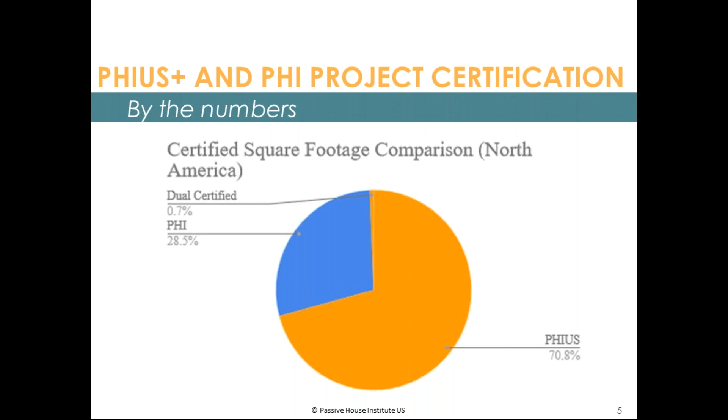You can see that PHI currently has a share of like 28.5%, and PHIUS+ has 70.8% with the climate-specific passive building standard, unlike the PHI standard, which uses one certification criterion in all climates everywhere. So now this is all just PHIUS+ data, only PHIUS+ projects. As I mentioned, we keep a very close look on the data that comes in from certified projects.

Here on the left-hand side, you can see that we're, of course, logging all the square footage that is in the pipeline. And in that graph, we can see now that we're very clearly on an exponential growth curve. We're doubling compared to last year, and we're well on our way regarding the projections here. And the projections for 2019 are indeed to reach 10 million submitted square feet by the end of the year.

On the other hand, PHIUS+ certified and pre-certified square footage, that essentially are the projects that are fully done, and those that have gone through the pre-certification design review and have been approved for going into the construction phase. Often those pre-certified projects then stay in that construction phase for quite a while until they get finally certified. So this is a good view of the projects that are either completed or in the process of being constructed. And you can see right here that those now total roughly 5 million square feet as well. So this 1-to-2 ratio that I mentioned earlier.

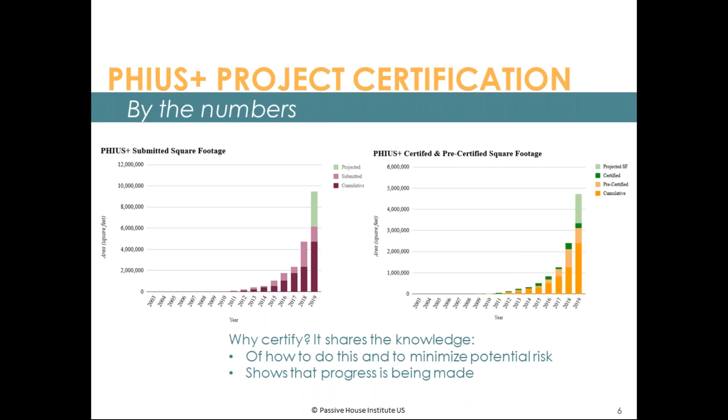And we are very happy with that result. Of course, this is not good enough yet. We're trying to get within 5%. And we keep continually improving our modeling tool, in this particular case here, the WUFI Passive modeling software.

I'm not sure why I am having trouble advancing.

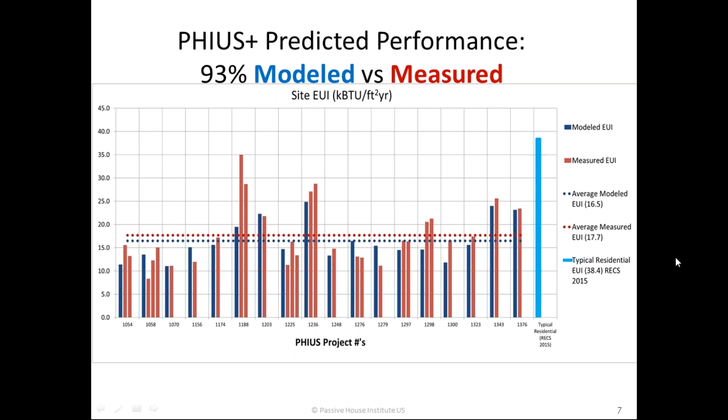Okay, here we go. PHIUS+ certification. So at this point, where our source energy targets are set, and I'm going to show you here in a second the architecture of how the standard works again quickly as an overview. But just to put us in context in relationship to other organizations that are pushing for similar goals. Here, the Architecture 2030 Challenge that you might all be familiar with. We are currently on target to meeting their 70% carbon reduction goals here within their system.

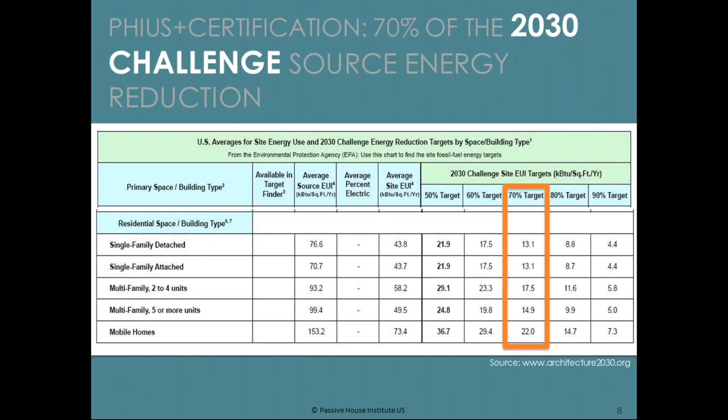But really where the secret sauce of passive building and the PHIUS+ 2018 design methodology comes in, that is a different focus than just looking at source energy reduction and carbon energy reduction. We are also first and foremost looking at optimizing the envelope for the best possible result in terms of conservation before we hop off to getting into other renewable solutions and active generation.

And this kind of architecture that we're talking about here, pass-fail standard, is still the same kind of architecture under PHIUS+ 2018, but really the secret sauce is here that we're setting cost optimized, climate optimized, and that means optimized for comfort and resiliency, space conditioning targets that first help the designer to dial in the envelope for the building and the loads and the systems. And only once those space conditioning targets have been met, then a total source energy criterion is applied, and that has to be designed too.

So under programs that are just requiring source energy reductions, EUI reductions in order to reduce greenhouse gas emissions, those programs are missing, in our opinion, this critical step of optimization to take advantage of conservation in the built environment.

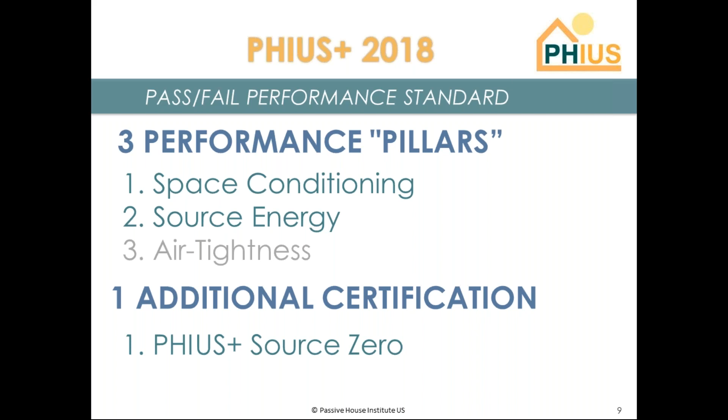So the methodology here that we're using to dial in the climate-specific space conditioning targets and to also cost optimize them is that for 2015, we developed a methodology to use the BEopt tool from NREL, from the National Renewable Energy Laboratory, to help us optimize for the sweet spot between conservation and generation.

You can see this curve right here on the left-hand side where you see the number 1. That is basically the code baseline. The green line represents energy use reductions. And then the more you invest in the envelope, and then once you get past the point of diminishing returns, you push back up into the diminishing curve for the upgrades, and they do not pay back.

So we used that tool to identify this sweet spot on the path to zero before it becomes more cost effective to switch over to renewable energy, let it be off-site renewable energy or on-site renewable energy, to generate that particular sweet spot for all different climate zones, locales, and considering the North American cost structure.

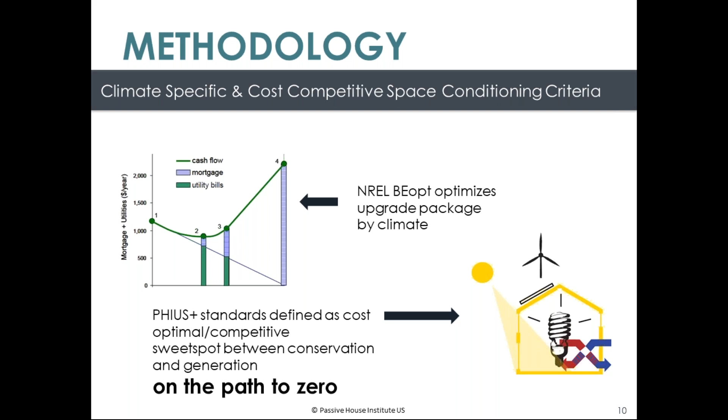And we have computing technology now, like the BEopt optimizer that NREL has developed, that can actually calculate these optimal design points. So space conditioning, why is this the critical secret sauce here for PHIUS+ 2018 before we aim to get to zero?

Again, for PHIUS+, we have 4 different criteria that have to be met under the space conditioning pass-fail segment. We have the heating demand, the cooling demand, and they all differ by climate. We have the peak heating load and peak cooling load. All those 4 criteria have to be met.

And the reason why they have to be met is, for one, the annual demands for heating and cooling actually translate into the kilowatt hours saved on an annual basis, so they pay back the initial investment. And the low peak loads, they ensure comfort. They also ensure resiliency, passive survivability, and they also reduce the mechanical system sizes, follow-up maintenance, and so forth.

So in 2015, the reduction versus code, in the study that we published with NREL, the climate-specific passive building standards, we showed that the targets could easily be reduced for heating demand and cooling demand compared to the code baseline. For heating by almost 90%, for cooling almost 50%. And cooling is much harder to do with passive measures.

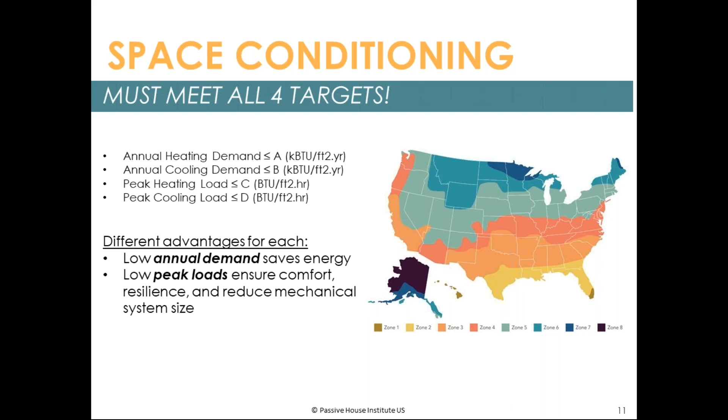But the good news was here that the peak load capacity was much closer to each other, like 77 peak for heating and 69 for cooling. So that results in an overall total energy reduction of 80%, and with that, the related carbon emissions. And we were absolutely on track with what we were doing here.

You can see right here the Building America Research Agenda for the time period of 2020 to 2030. They are very much looking at what we have already established in PHIUS+ 2018, crushing the thermal load even further compared to their work from 2010 to 2020. And that qualified us to then enter into a partnership with the Zero Energy Ready Home program.

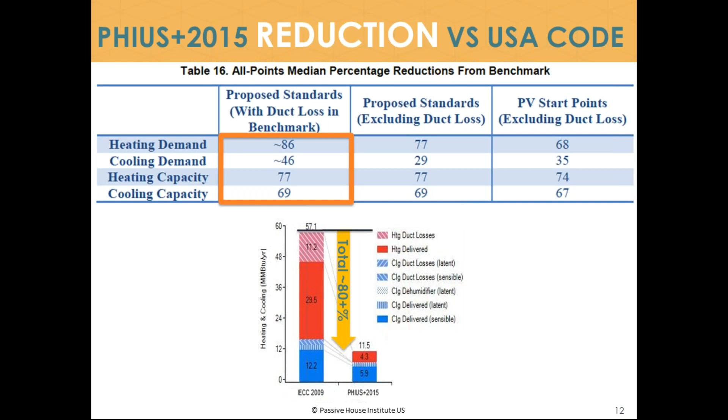We are the only climate-specific passive building standard that exists, and they honor that by making us a partner of the Zero Energy Ready Home program. We also require Zero Energy Ready Home requirements as a prerequisite to our certification, which is a really solid building science foundation, a bit more on the prescriptive side of things, but again, more requirements to ensure that risk is mitigated and that the quality and the durability of the building is assured through the certification process.

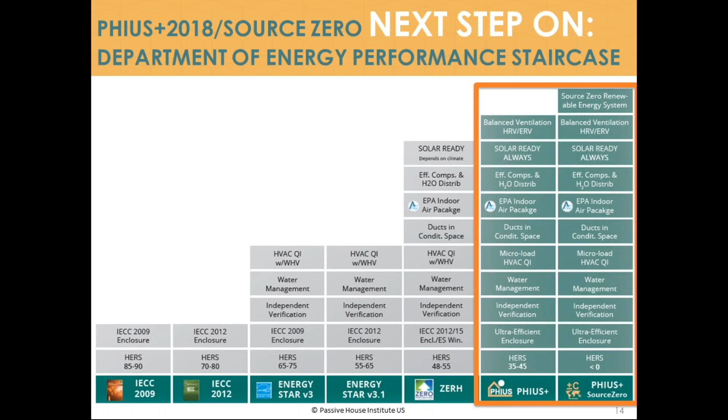And again, here, Sam Rashkin from the Department of Energy Zero Energy Ready Home program created this kind of staircase that follows along the Department of Energy research agenda. So that takes me to the process and the actual PHIUS+ 2018 updates.

The passive design principles, nothing new. Most of you are familiar with those. I think we all have gotten really good at employing them and understand them very well. Just quickly going through here again: continuously insulated envelope, no thermal bridges, airtightness in buildings is an excellent measure to bring the energy consumption down.

To increase energy efficiency, we have heat recovery ventilation, controlling shading, dialing it in by climate, shading and heat gain as well. And then we also have the hygrothermal side of things on the bottom half of this circle that we need to concern ourselves with.

The humidity, how the humidity affects the energy balance, how the humidity affects the envelope. Do we have condensation risk in the envelope? How does the HVAC system interact with the envelope? And then also we have the hygrothermal storage. That lower half of the circle, those are all elements that really need to be calculated in a dynamic tool to accurately represent the effects of moisture and thermal storage and interaction with the HVAC system on the building.

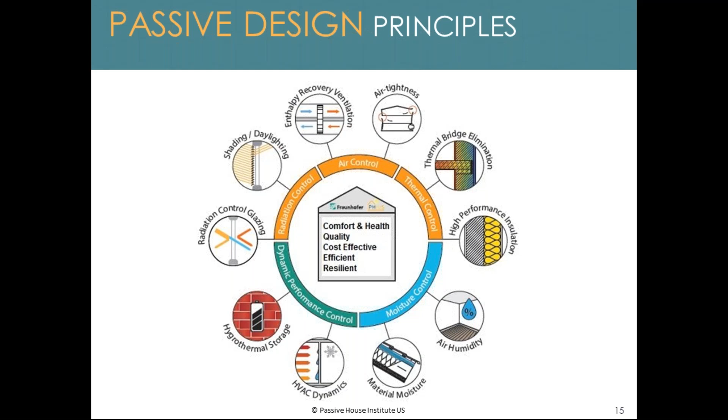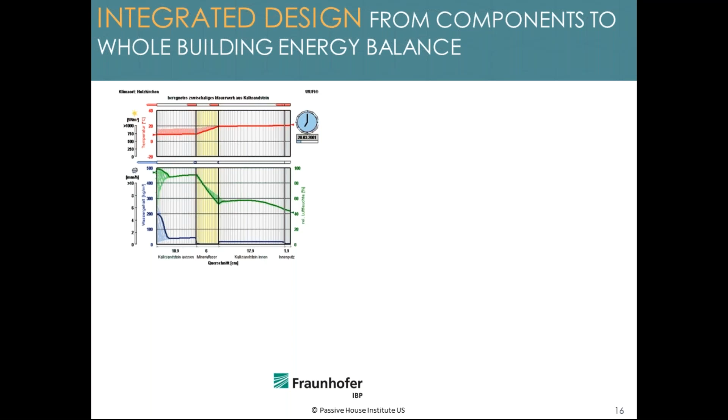So once we dial all that in, then we get a building that is very comfortable and healthy. Quality is high, the durability is high, very energy efficient and resilient. So to do that, we now have quite powerful dynamic tools that can perform this analysis for us and help us in the whole building energy simulation, taking all these factors into account: climate data, air exchange, inner load, set points, all the specifications for the envelope.

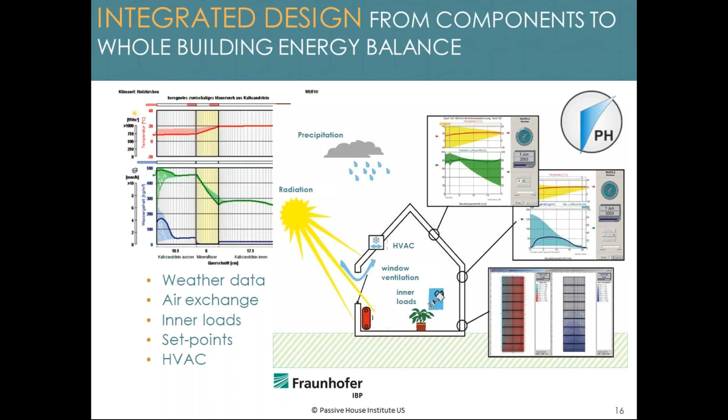The WUFI Passive tool can now analyze and help you to dial in the components for the building envelope exactly for your specific climate location, and you are being guided by the specific energy targets. Again, the energy targets are really crucial to get a well-optimized building for that particular location, and also built into the actual targets is the cost optimization for that location. So you get the best optimal result at the best cost for your building.

Now, when we decided to recalculate those targets that we had established in 2015, we were able to use a few learnings from the years up to 2015, up to the rework of the 2018 standards. For one, as I mentioned earlier, initially we had seen only single-family projects, but we soon saw a lot of very large multifamily projects come into the office for certification. And very quickly, it was clear that large buildings have a much easier time meeting the targets that we had set.

So the initial 2015 targets were set based on a standard single-family home, 2,500 square feet, and the theory there was that that is really the worst-case scenario, and anything bigger will have no trouble meeting these standards. But because we have this computing power at our fingertips now, the Building Energy Optimizer and WUFI Passive, we were able under 2018 to set our goal a little bit higher and say, look, we don't have to be that non-granular, just establishing for the worst-case scenario and saying everybody else is going to have an easy time to meet it.

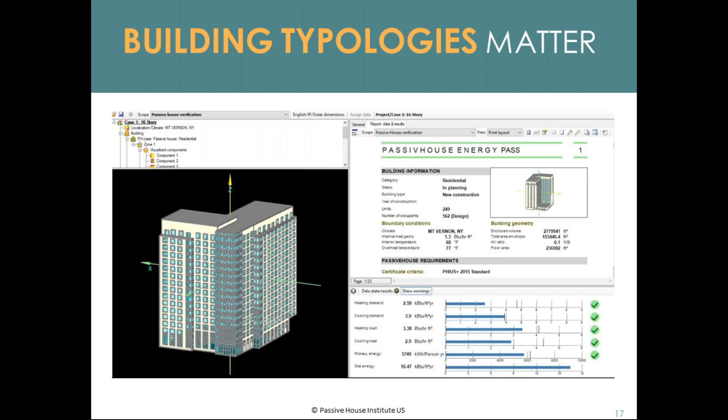We can actually optimize not only by climate for the North American cost structure, but we can also optimize for building typology. And it's not only that we can, we should. So that's essentially what PHIUS+ 2018 is about, as well as a shift in thinking about the source energy targets. So just quickly here, a summary of this idea: big buildings, you can see this on the right-hand side, much less R-value required in the walls to meet the targets under 2015.

And then the little building, single story, lifted off the ground here. This is a Staten Island project. It had a really hard time, to a point where the builder is not going to do it again because it was cost prohibitive. This was a grant-funded project by NYSERDA actually. The builder had initially committed to 5 projects, but I think only 3 were built, and it was clear that the R-values were not cost effective, so it was abandoned. So there was a clear need to create targets that are more specific to the individual building typology.

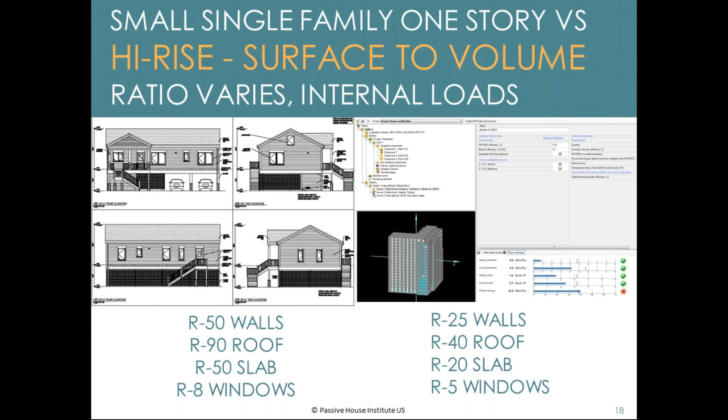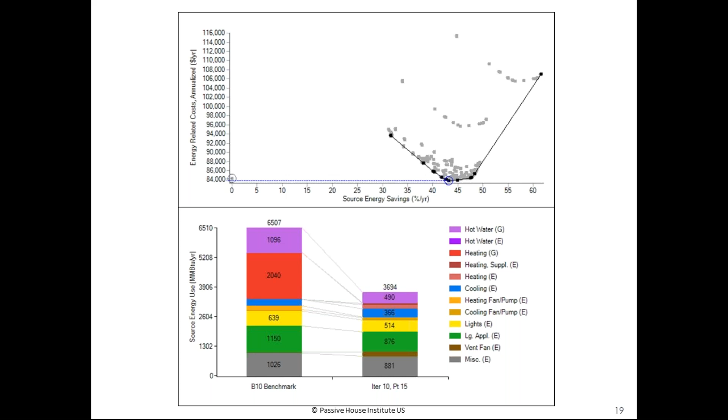So that means that the last percent to achieve higher source energy savings would be really expensive, and our goal was to find that optimal sweet spot between conservation and generation. All right, so these are the 5 building typologies that we calculated for all different climate zones, and we also used different occupant densities. It very quickly became clear as buildings became bigger that occupant density and internal loads have a significant effect on what the optimal design for the envelope would be, and we had to figure that into the standard-setting process.

So we did. And again, side note here, the architecture of these buildings, these are really just typologies to distribute the amount of glazing that we anticipated, and it's not claiming to be pretty.

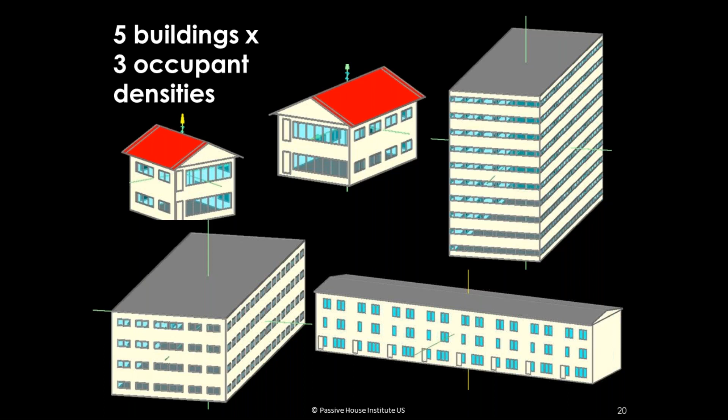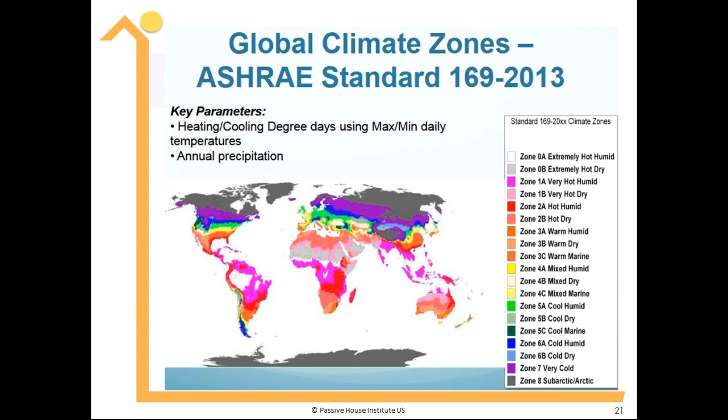It's just study buildings. All right, so while we were at it, we also optimized for basically all global climate zones, and in that effort, we also aligned with the ASHRAE climate zones, as you can see right here. So the new standards are based on these global climate zones. And just to give you an example now, how those different targets... So basically now we are taking building size into account and occupant density.

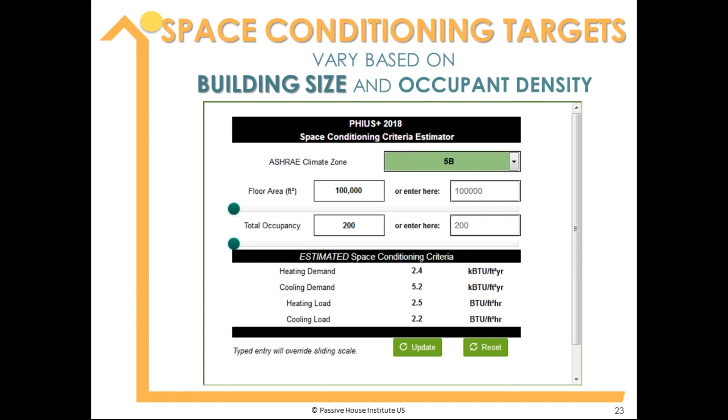So if we switch to a really big building with lots of occupancy, actually the heating demand and cooling demand switches. So the building now is dominated in the same climate zone by the cooling demand and no longer by the heating demand, because there are so many internal loads in the building. So heating really is no longer a problem, but cooling becomes the problem because of those internal loads. And similarly, the peaks are actually closer together now.

So for 2018, what changes? All the different heating demand, cooling demand, and peaks have been updated by building typology and occupant density for each climate. Lots of calculations went into that one. The air tightness was updated to 0.06 CFM per square foot of envelope. That was really just a rounding error; this is a fixing of an earlier inaccuracy. And then the source energy limit, you might notice right here, got tightened to 3,840 kilowatt hours per person and per year, and source energy for non-residential to 34.8 kBTUs per square foot and year.

So all the other targets, while they changed, we feel they are much better suited now to really dial in the optimal solution, cost, comfort, resiliency-wise, for each location. The biggest change is the tightening of the source energy limit, and with that also the thinking of the tech committee in terms of how to get from here to zero. So we've always said we were planning to tighten the source energy limit, but we never really aligned ourselves in our philosophy with, for example, 2030, which has very clearly laid out a pathway to zero, like a certain increase in savings every year.

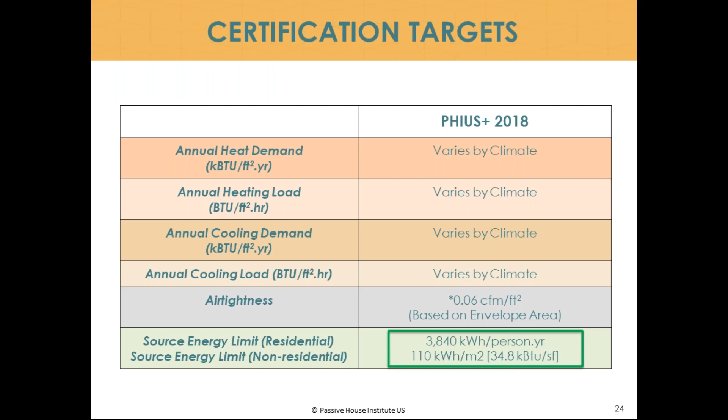So for 2018, the technical committee has decided to align with that philosophy and has decided that we have to get to zero. Now, this is a difficult thing to do, obviously, and some of you might be looking at this number, 3,840 kilowatt hours per person a year. And those of you who are working on multifamily projects might get a funny feeling that dense buildings will have a very hard time meeting this new source energy limit. So there are a couple points of relief here. I'm going to go through this real quick because that explains that point.

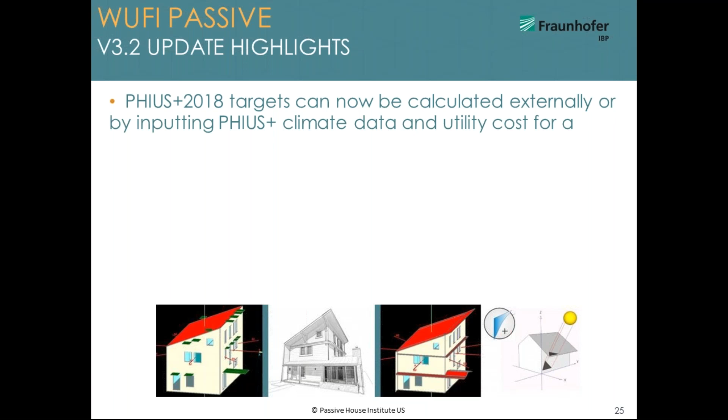So in WUFI Passive, we now have those updates integrated. The new version 3.2 has come out. And so now you can either externally, with this calculator that I just showed you, calculate your targets, or you can generate them by inputting the climate data and the utility cost for your project within the software.

So here's the explanation for the point that I was trying to make on the previous slide. The new source energy factor is actually less stringent than you might think when you first see the tightening from 6,200 to 3,840 kilowatt hours per person. Previously, we were using a source energy conversion factor of 3.16. We use a national grid factor to determine source energy because we believe that we're all in the same boat. And so it's essentially kind of like a non-monetary subsidy from one region that maybe is a little bit cleaner to the other region that is not as clean, to meet our overall national goal in terms of carbon reduction.

So now in the new WUFI version, we have updated the conversion factor to 2.8 because the US grid has become cleaner. So essentially the tightening of the source energy criterion is not as drastic as one would think, for one. And then for Canada, we also updated it to 1.96. So that makes up for much of the tightening, but the concern still remains that if you have a multifamily project that is densely populated, it will be difficult to meet the resulting source energy criterion. If you use a fairness principle as we do, every person gets a certain budget, like 3,840 per person.

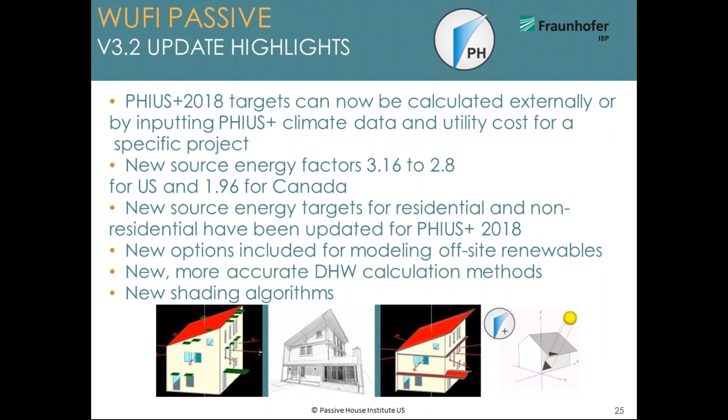We're excited about this new shading algorithm. We feel that will help to get us closer in terms of modeled versus measured. So now, very quickly, a word regarding the fairness principle that I mentioned earlier, in terms of determining the source energy criterion and the potential alternative path that the tech committee and the board are going to offer to folks certifying.

So PHIUS has established a fairness principle based on a fair share of source energy contribution per person, based on the total carbon reduction that we can afford to emit by 2030. And other organizations have different definitions, different motivations. Architecture 2030, their goal clearly here is to get to zero in terms of carbon, other than the DOE motive to get to zero. The DOE motive is more like energy savings, more resilient grids, and the Architecture 2030 motive is carbon reduction.

So while we have a fairness principle based on a per person basis, Architecture 2030 is looking at creating this target that should be met differently. And they still have the same goal as we do, like X reduction in a certain amount of years to get to zero to stabilize the climate. Now, the way that 2030 is actually calculating source energy is based on a percent savings basis. So they have a different calculator, essentially, and that results in slightly different targets. They're all still very close, because we're all trying to get to zero. But the final word has not been spoken on what the source energy bucket should be that we have to meet at what point in time on our path to zero.

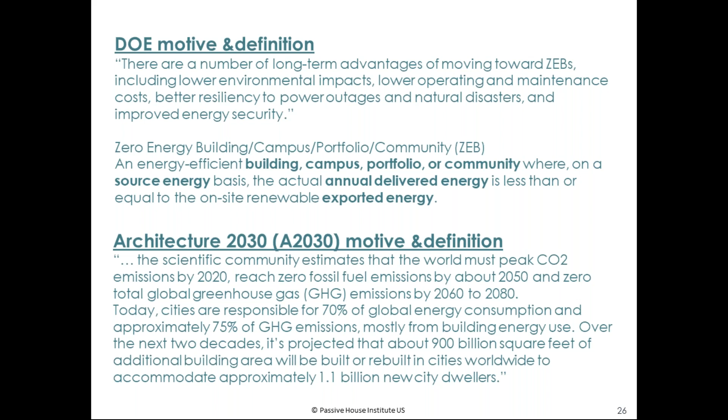So essentially, what the board has decided is that the tech committee should take a look at including a zero code compliance path, basically using the zero code calculator from the Architecture 2030 organization to determine the source energy factor. Turns out that that source energy factor is much closer to the old targets in PHIUS+ 2018, which will help larger buildings with higher density, if they choose this certification route as an alternative.

Of course, the tech committee feels very strongly about PHIUS+ 2018 and the per person fairness principle to determine source energy. We would prefer for teams to choose the 2018 path, but the tech committee is considering an alternative path through the zero code from 2030. Quick side note here, their recommendation on how to design an energy efficient building.

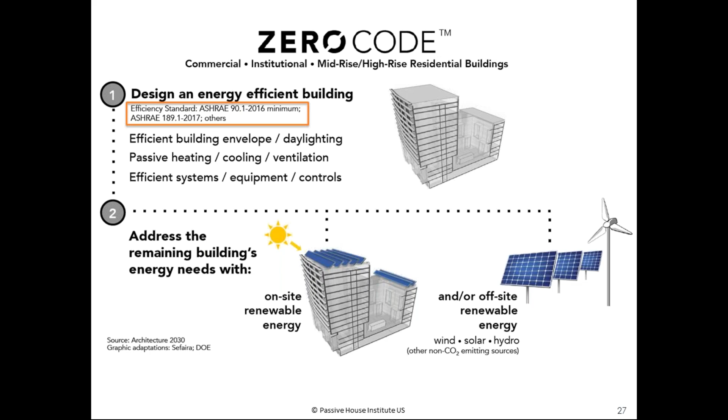First step, obviously, the shell, and then add renewables based on ASHRAE 90.1 2016 or 189.1. We again would like to suggest that the passive building design methodology that follows the architecture of designing to space conditioning targets that have been cost optimized and climate optimized first, that is a critical piece that is missing in the current zero energy

discussion. So last year we proposed an ASHRAE passive building design standard, and it was adopted by the standards committee in January at the Atlanta meeting. And currently ASHRAE is working on putting this committee together. So we're very excited that hopefully this work will result in a passive building high performance pathway that will be making it easier for code officials to adopt that design strategy.

Okay, and that takes me to the last portion of this presentation. Trying to drive home why designing to passive building standards, cost optimized and climate optimized, PHIUS+ 2018 is so crucial, not only for the building itself and for energy savings reasons and comfort and health, but also for the redesign of the overall system of the delivery of energy, the redesign of our grid.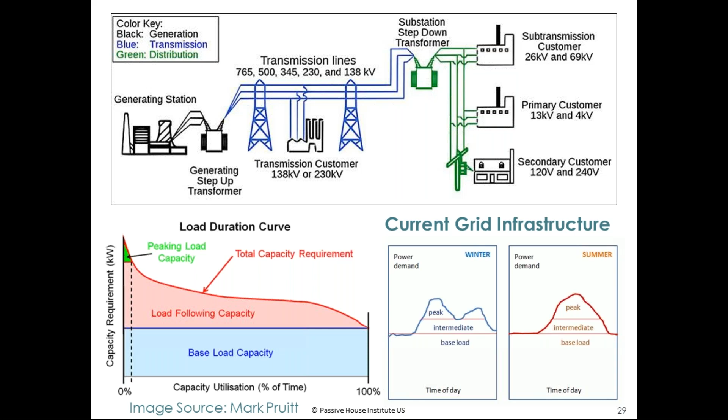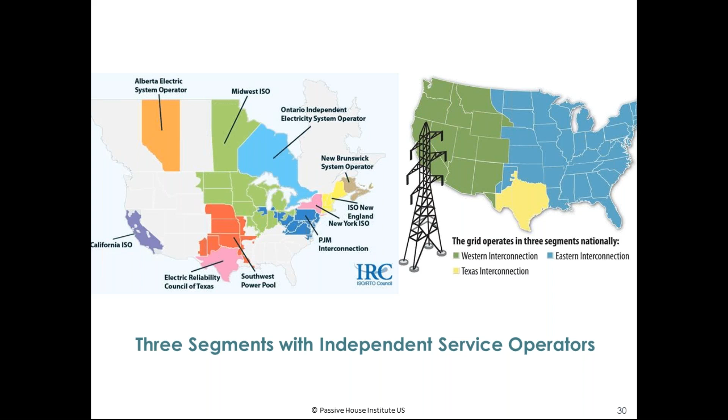So when we look at the various segments of the grid, and we're starting to look at how to get these different segments of electricity delivery to zero, showing you this overall right here. I'd like to zoom in on the Texas example right here. So Texas is one of those three segments that operates the electric grid and also manages the deregulated market.

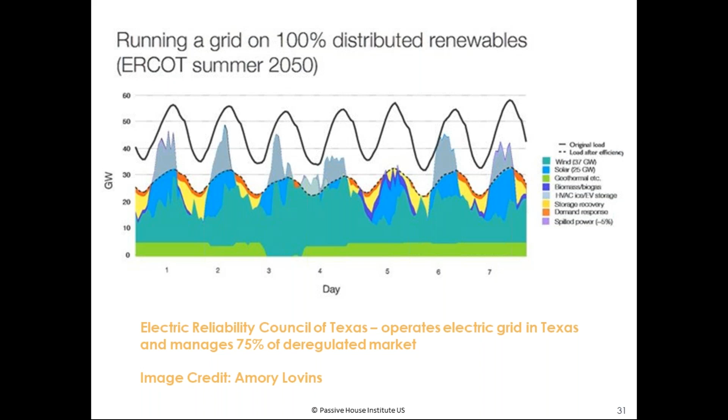So this is a slide right here created by Amory Lovins from the Rocky Mountain Institute that essentially shows, if that Electric Reliability Council of Texas has the goal to be all renewable 100% by 2050, what they first need to do is basically bring their base load down. There's a mismatch. Even if they had all solar production, the load is too high. So essentially, energy efficiency measures have to be applied to bring that base load down, so we create a better match between solar production and usage.

Now, that is still a problem because on a daily profile, a lot of you might have heard of the duck curve. If we have inefficient buildings with lots of PV production, they produce a lot during the day when the peak is not there. In the evening, when the sun goes down, then the need for energy goes up, but there's no more solar. So we create this overproduction during times when we don't need as much energy and we don't have as much when we need it. So that's a problem for the grid.

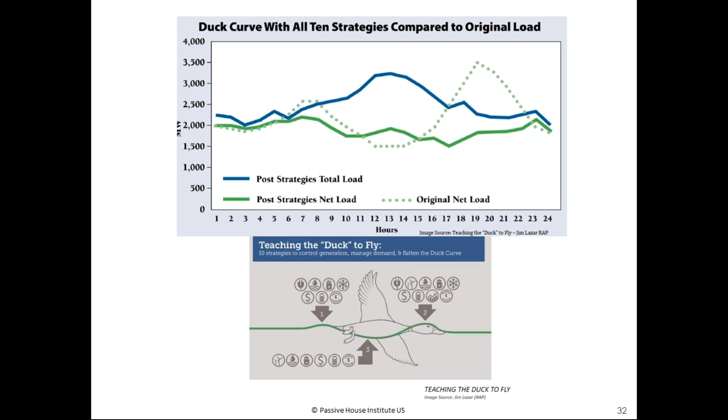And you might have heard of the concept that the duck curve can now be basically flattened by using 10 strategies, which I go into here in a second. Essentially, we're trying to teach the duck to fly, and these next couple slides are from a paper and presentation that Lisa presented at the last conference, which is really, really critical to the point that we're making here. So essentially, we're now applying these 10 strategies, and a lot of them are passive strategies and conservation strategies, which essentially push down the peak in the evening, and they bring up the bottom of the duck from overproduction. So here, these grid integration strategies, as we think about 100% renewable grid and how our passive buildings fit into that grid, it all makes perfect sense.

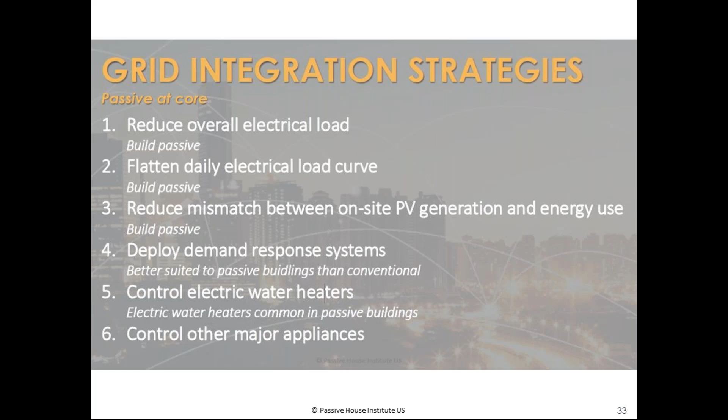So the strategies here of reducing the overall electrical load and flattening the daily curve, reducing the mismatch between on-site PV generation, because now the very efficient building only needs a very small PV system. And then in addition to that, we can deploy other demand responsive systems that control further what and how much energy is being used in homes. So the demand response systems are much better employed in passive buildings than inefficient buildings. And then beyond that, we can have additional technological controls, like potentially controlling electric water heaters, artificial intelligence, so on and so forth.

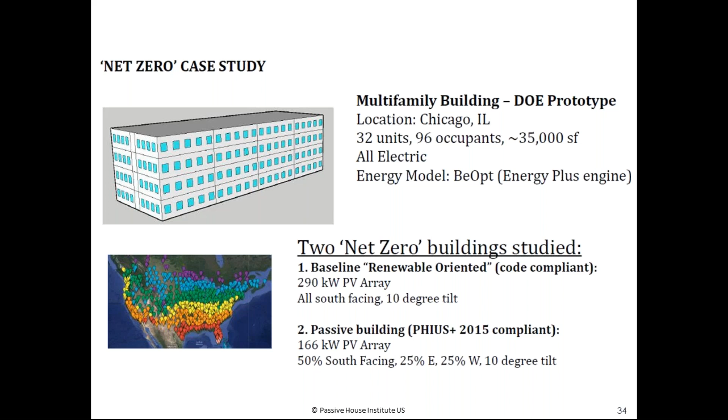So very quickly, Lisa ran a case study, basically a multifamily DOE prototype project through DOE, one that was just code baseline essentially, and then she ran it through, at the time still in PHIUS+ 2015, through the WUFI Passive software. And here is the load profile from those two buildings in comparison.

So you can see right here that the baseline in the code building, the loads are obviously much higher, but also the mismatch, because to get an inefficient building to zero, you need a large PV system. You're causing a whole bunch of spikes as you're trying to zero out your energy consumption and sending stuff back into the grid, causing problems for the grid and creating the duck curve. Now the passive building flattens the peaks, and it also flattens the production that goes back into the grid and could cause this belly of the duck.

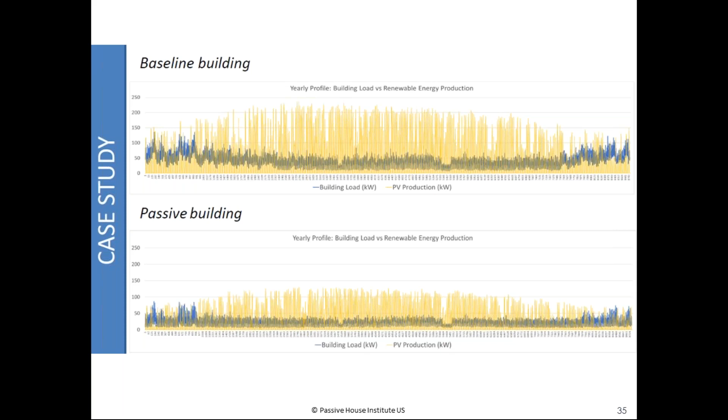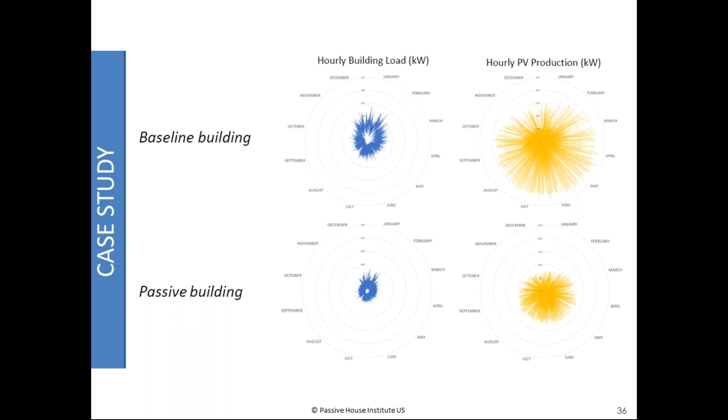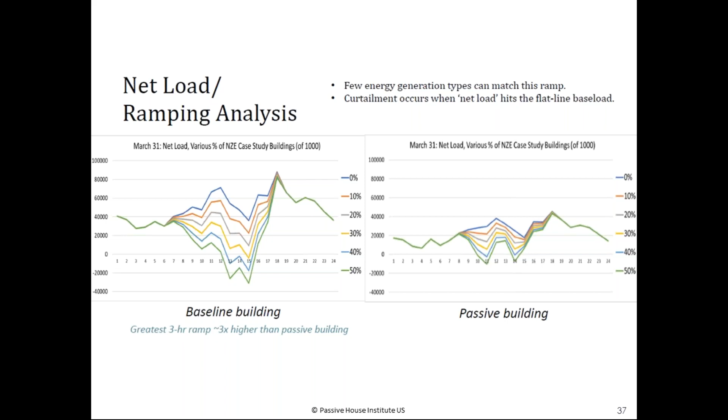Another kind of graphic representation here saying essentially the same thing. The tighter the core in this graphic right here of the base load and of the hourly PV production, the less spiky thing we see there, the closer we get to kind of like a core element of the newly redesigned 100% renewable grid. And again, here, the point that I already made, the baseline building does have this kind of duck curve belly on the bottom and the head sticking up on top. The passive building now flattens out the belly and brings down the load in the evening of the day profile.

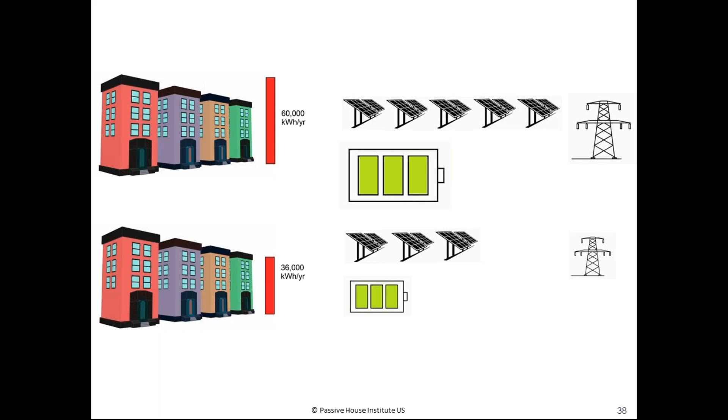And Lisa calls that the ripple effect, and that is a really good way to express what happens. It's not only that the building itself is more efficient, but every kilowatt hour that is saved on site will ripple throughout the entire delivery system of the grid. You can see it right here. The baseline building needs a lot more PV than if the same townhouse row here was built to passive standards. And as a result, not only is the PV system smaller, but also the battery storage is smaller, and also the grid that is needed to distribute and to redistribute is much smaller.

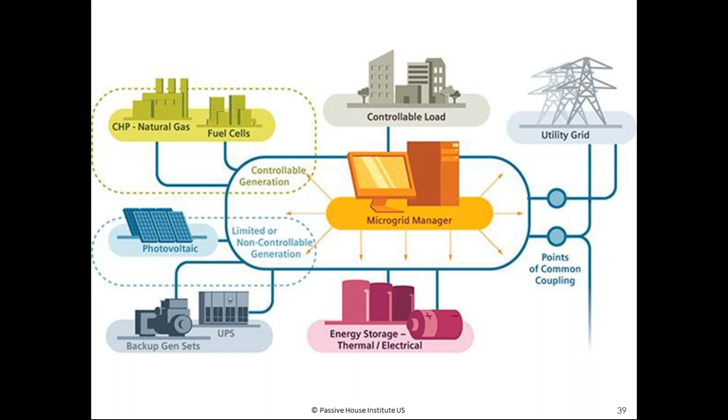So essentially, when we envision a 100% renewable grid redesign that is based on decentralized microgrids, we have a controllable load of our buildings, we have controllable production of our buildings, and the less goes into the microgrid managing system and redistribution of those energies, the less infrastructure is needed, less cost is needed, less battery storage is needed to smooth out the peaks. So great stuff. This really makes the case why PHIUS+ 2018 cost optimized and climate optimized envelopes and building systems are at the core on the path to a renewable energy economy.

And then there are great projects that I want to end with here real quick. The Realize project, some of you have heard about, industrialized exterior retrofits to zero energy, following the Energiesprong model. We're working with Rocky Mountain Institute on that one. And this is a perfect example right here. They are bringing the load down first. They're upgrading the envelopes to basically passive levels. And then they also employ artificial intelligence, on-site storage and water heaters.

It is really quite amazing what folks are doing over there in the Netherlands. They're already quite a bit further along. And that also includes how they look at the energy saved in a zero energy project, potentially how to access the energy saved and the value of that by essentially creating a new kind of almost like an electric co-op on a per building basis. So essentially a microgrid subsegment for a townhouse.

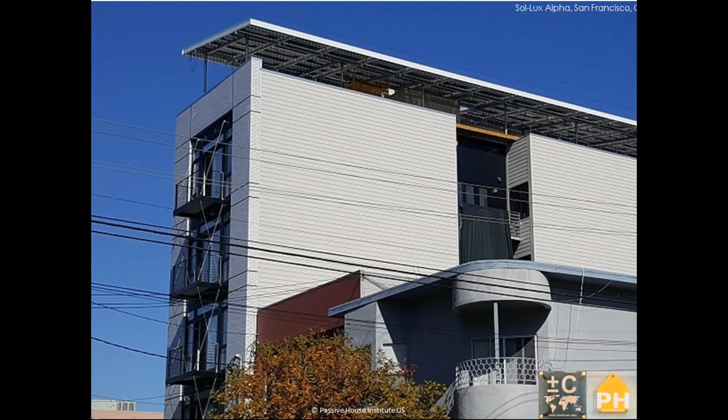So as we looked at our certified projects from the last couple of years, Beach Green Dunes in Queens here, the first microgrid multifamily project, Sol-Lux Alpha in San Francisco, the Onion Flats Belfield in Philadelphia, and the Rocky Mountain Institute in Basalt. All of those projects, we realized they are already going much further than our standards necessarily required them. They are trying to get as close to zero as they possibly can. But all of them used the PHIUS+ standards as their baseline. And the good news is that they already went further, and it was within their budget.

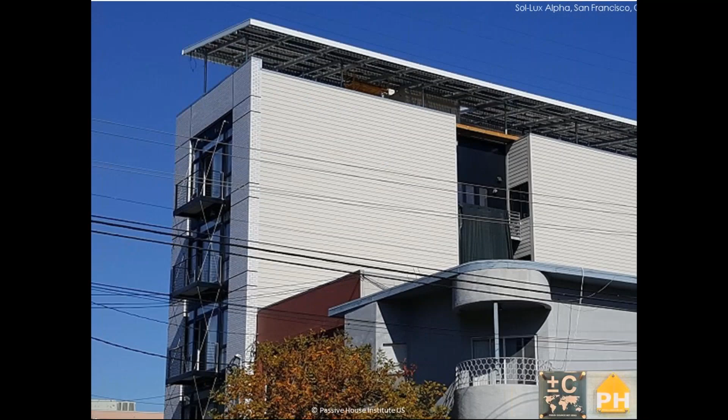So it appears that these standards are really successful at optimizing the envelope for cost, so that there's additional budget left over still to maybe make a little bit of a stronger push down to zero. So for example, the Beach Green Dunes project is producing 30% of its own energy on site from combined heat and power and a sizable PV system on the roof. And that's an 8-story building. So it is really a fantastic project.

Rocky Mountain Institute headquarters, totally, they are overproducing by far. They have a whole bunch of electric vehicles in the parking lot for the staff. Absolutely fantastic performance of that project. And then here's the first completed Seattle multifamily project. That one, I'm not sure if it actually has photovoltaics. I should check with certification staff.

And then last but not least, a little bit of an anecdote. Some of you might remember my house that kind of kicked things loose in 2002, the first passive house on this side of the ocean. I built it in 2002 with a plan by 2020, having had time to save up money for a PV system. And finally, last fall, I put it on.

This is a 5 kW. The roof is not all taken up. I'm overproducing by 3,000 kilowatt hours, which I'm intending to charge my electric car with, which I don't have yet, looking for it. But just living in it and seeing how it works, it is absolutely phenomenal. It feels really good.